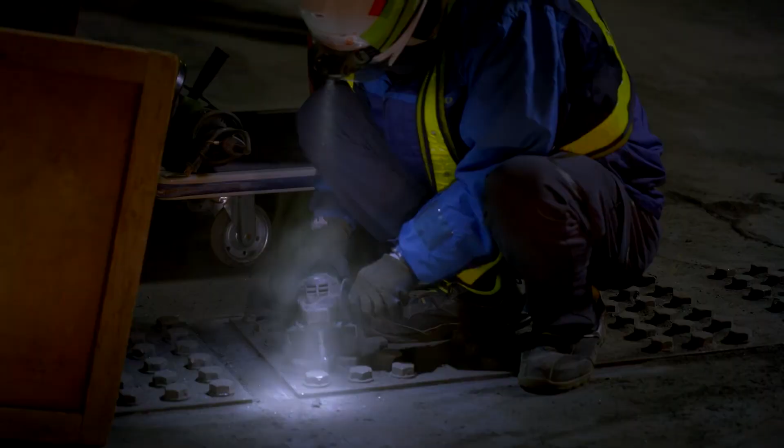Many vehicles pass through, even during the night. Engineering staff continue to maintain the expressway regardless of the time of day, and the maintenance of the expressway is achieving great strides in its evolution.

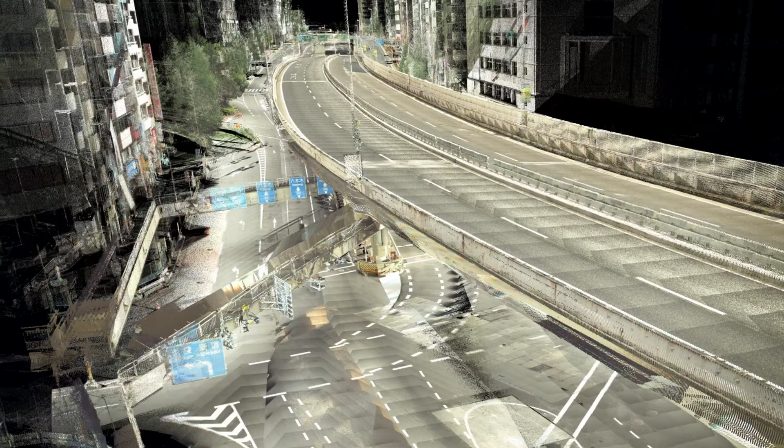A new maintenance system, called iDreams. The engineering staff are currently creating another digital expressway. Take a look at this most advanced system. iDreams has everything from when the expressway was built, to the present day, and to the future.

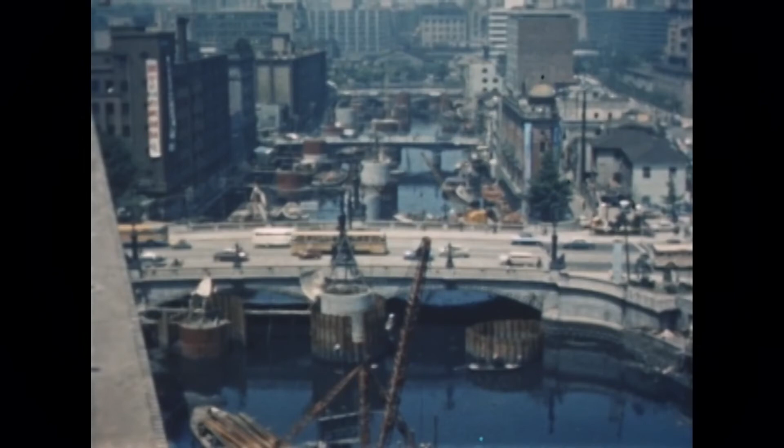For over 60 years, the Metropolitan Expressway has been finding ways to alleviate congestion. In the water, in the air, the Metropolitan Expressway has been building the network in the greater Tokyo area using the latest technologies available.

Diagrams and documents back then were written by hand. Such information was stored and kept only on paper.

What makes iDreams groundbreaking is that it takes all of the information available and turns it into data. The data are linked to the maps via GIS and managed comprehensively. With one click, you can find the information you need.

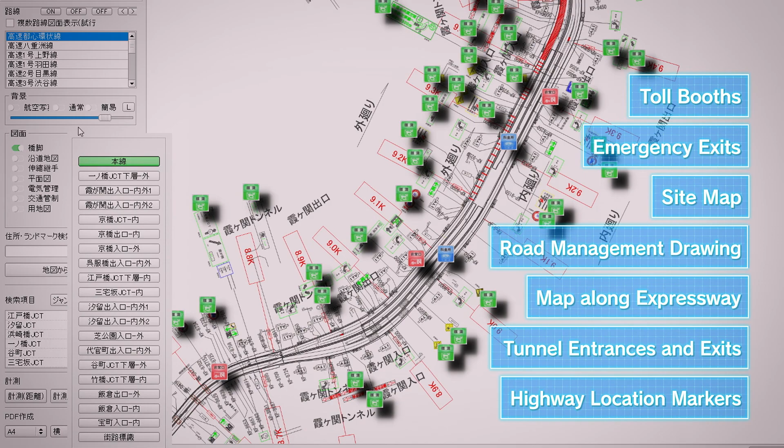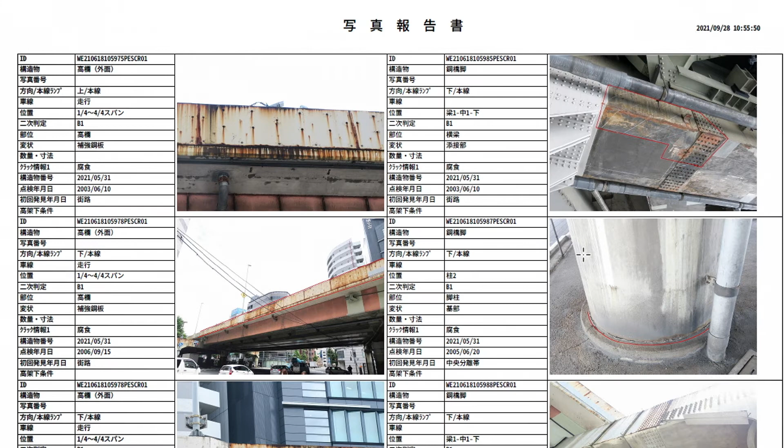By using the completion drawing library, you can see the blueprints during construction. You can also view detailed information such as inspections and repair records of each structure. The versatile register is easy to use. With this information, the development of roads can be seen easily.

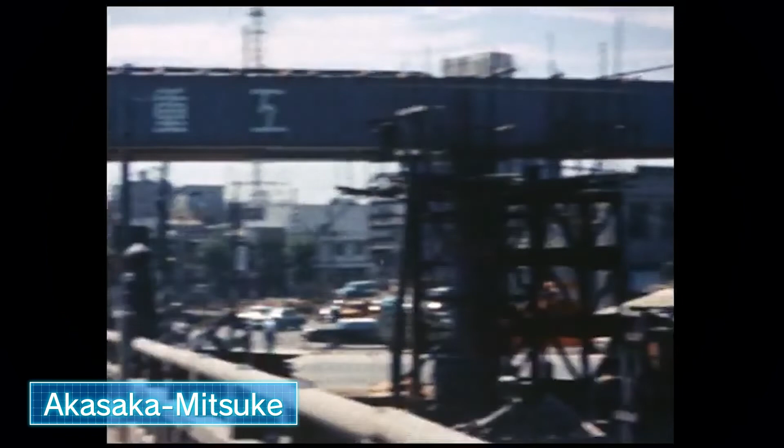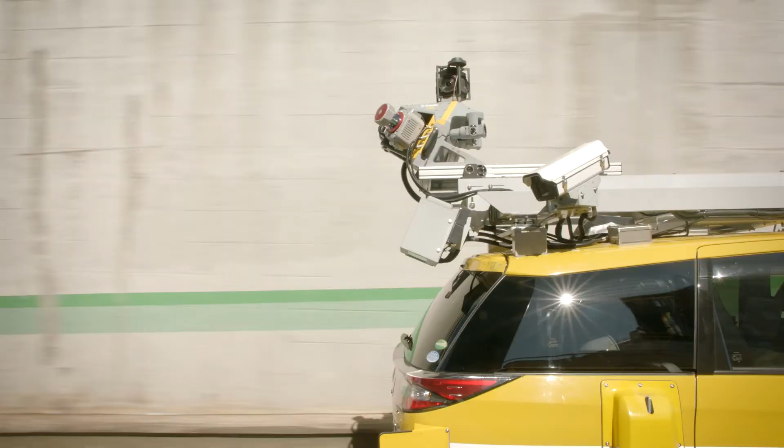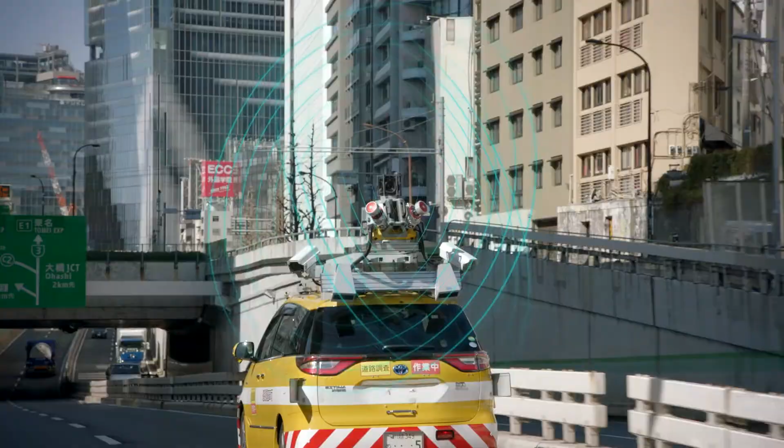Present-day data is currently being stored to create an even more convenient system. A car with an omnidirectional camera and a laser scanner surveys the expressway, scanning the Metropolitan Expressway and nearby facilities. It collects and stores three-dimensional point cloud data in iDreams.

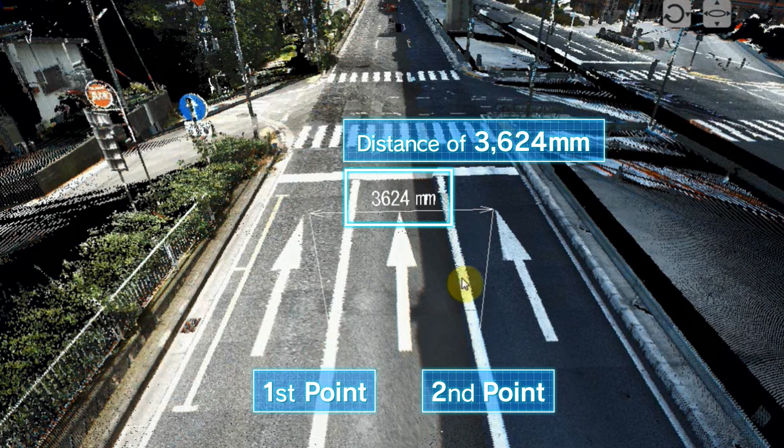The Metropolitan Expressway in the computer can be used for many things. It's possible to make on-site measurements in iDreams. The InfraDoctor system uses the point cloud data expertly, visualizing structures as well as changes or damages on a three-dimensional level.

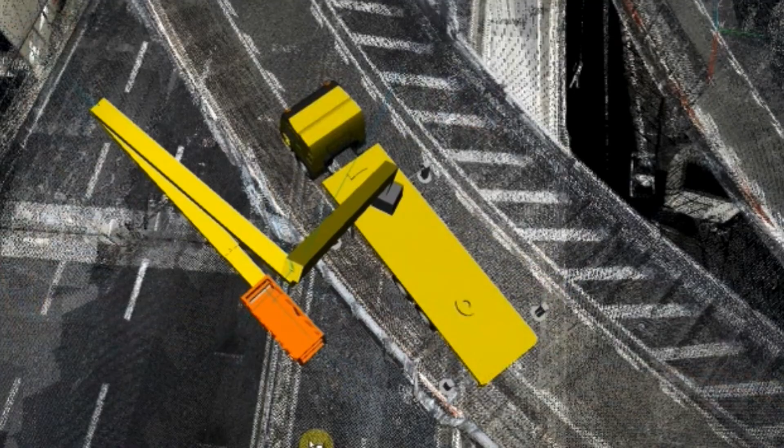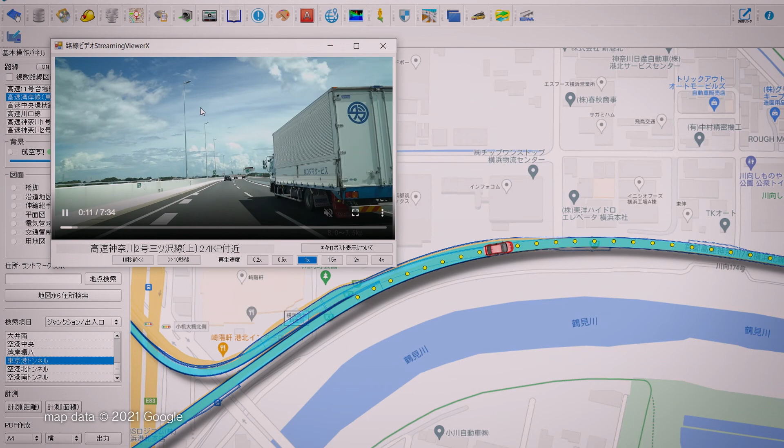Various simulations can be done on the computer prior to on-site work, making it possible to carry out work plans more accurately. It also includes facility monitoring data, videos of traffic, and data on congestion and the amount of traffic.

Various data is collected and stored in iDreams. This is the future we are striving for.

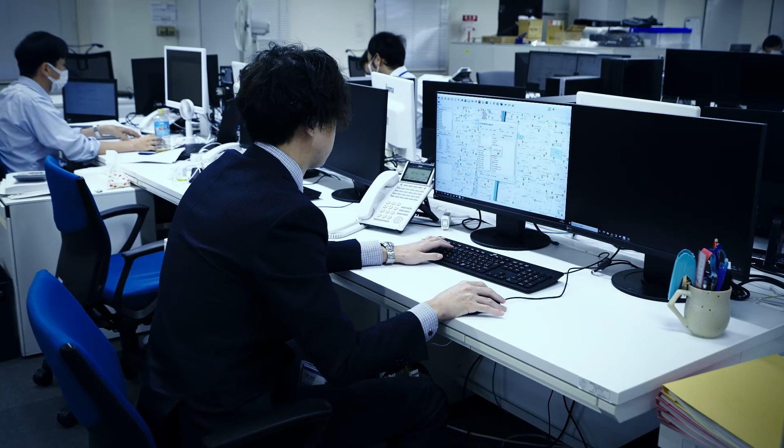Information such as the years a road has been used and the amount of traffic are used to predict structural deterioration. The system helps to create plans for repairs using this data.

iDreams shows its true worth during natural disasters. The Disaster Preparedness Information System is in development, for large-scale disasters such as earthquakes.

A patrol car will perform emergency inspections and share location and visual data with the system. Headquarters can assess the damage in real time. With data from remote supervision sensors and the Digital Metropolitan Expressway, Headquarters can quickly gain information on the damage to structures. We aim to fix any damage in a swift manner.

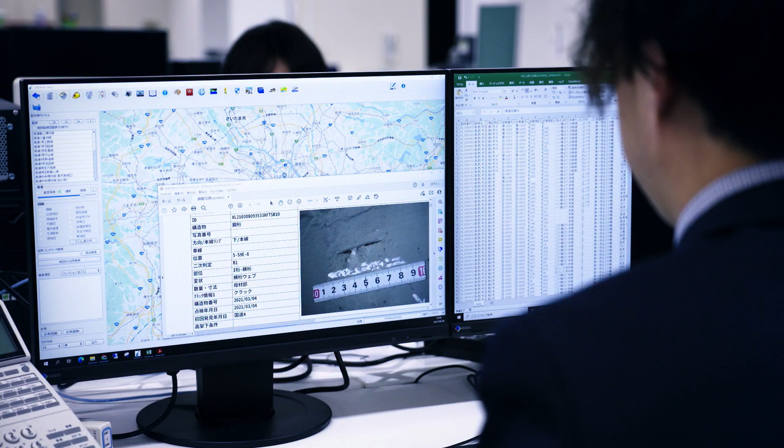iDreams inherits the technologies of our predecessors and leads us to the future with infrastructure management evolution. iDreams will maintain the future of the Metropolitan Expressway.